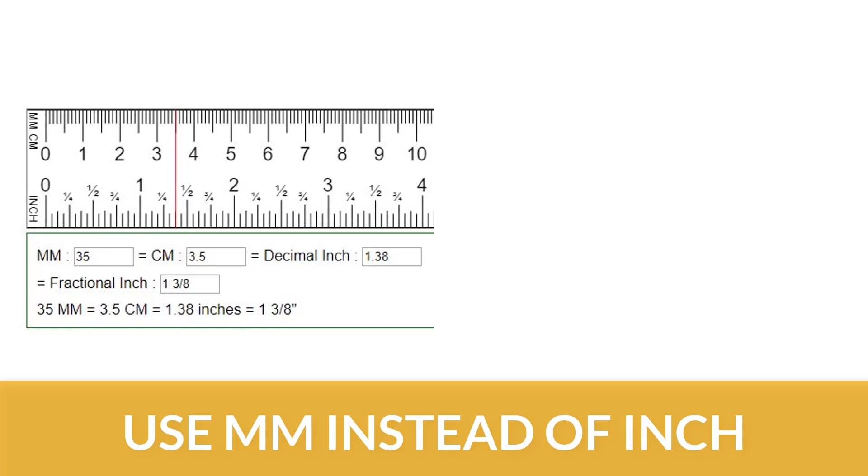That's the number one mistake from all my beginning students, designers. In the jewelry industry, we use millimeter instead of inch, and it may be confusing when you try to convert between those two units. The best way to learn the thickness is actually to have a digital caliper with you.

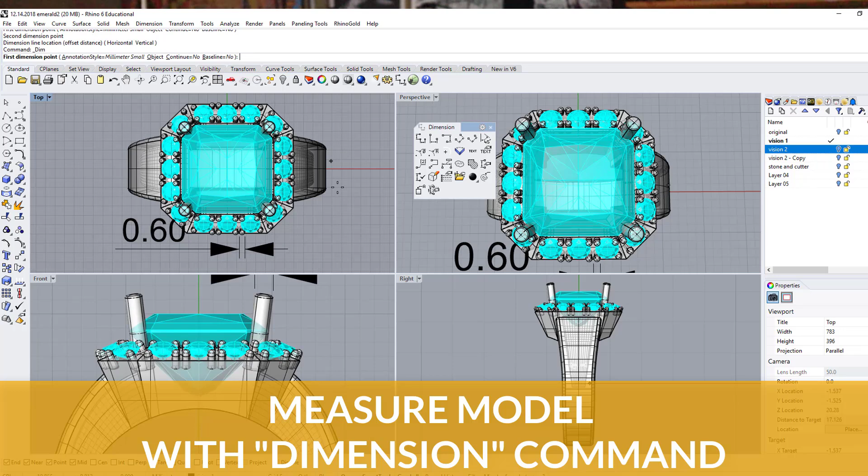Before you are ready to send out the files for 3D printing, measure the thickness of every part with the dimension tool in Rhino 3D and pull out your digital caliper to see what the physical thickness will be. It sounds simple, but many of my students didn't realize how thin 0.2 millimeter is until they see the hair-thick gap on their digital caliper.

It takes some practice. Even an experienced CAD designer may make the same mistake about thickness. I will also suggest you send it out for a plastic 3D printing first, so you have something tangible in hand to do the adjustment.

If you are in the United States, shapeways.com is the website that I recommend. Use the fine detailed plastic material, and an average ring will cost you about $7 to $10. For the beginner, it is worth spending time and money on the prototype and making sure that your parts are working the way you want before you cast them in precious metal.

This is important for the beginning jewelry designer, and it will help you gain more experience going from digital to physical print. In general, you also want to add thickness and weight to the silver design compared to the gold design in the same piece, because people feel it's worth a lot more if they can feel the weight in silver.

Jewelry CAD design tip number 2, understand how the stone is set. If you have done stone setting physically even just once, congratulations, you know how the stones are set and how you should design for the stone seat in CAD.

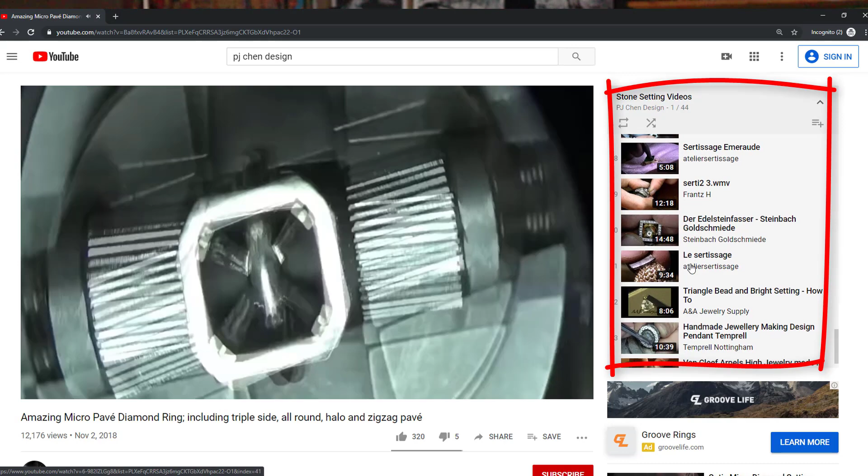If you are not familiar with stone setting terminology, you should start with something simple and most common, like prong set, bezel set, and pave set. Start with those 3 types of settings in your CAD model until you master them and move on to the rest. I will also suggest starting with a regular shaped stone like round and oval, and move on to the fancy cut with V prong later on.

Jewelry CAD design tip number 3, prong size for the stone setting.

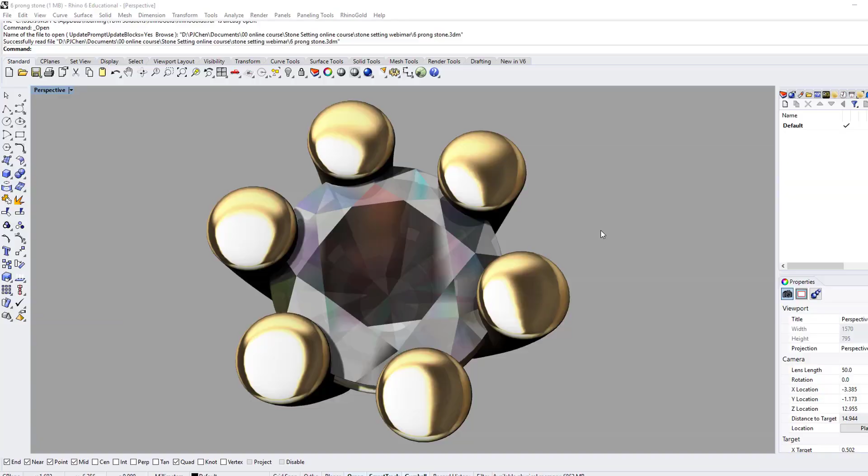After you watch a few stone setting videos and grasp an idea of how the stone is being seated and set into the metal, you want to start thinking about the aesthetics of the design. For example, if you have a 4mm round facet stone to do a 6-prong setting, each prong is 1.5mm in diameter. The stone may be super secure once it is set, but people will focus on the prongs, which are 6 polished shiny spots, more than the stone.

In fine jewelry design, we want to make sure that we expose the most stone possible, but secure the stone in place at the same time with the minimal metal. Metal plays the secondary role in fine jewelry design to hold the stone in place, so try to minimize the metal on the top view without losing security is the priority.

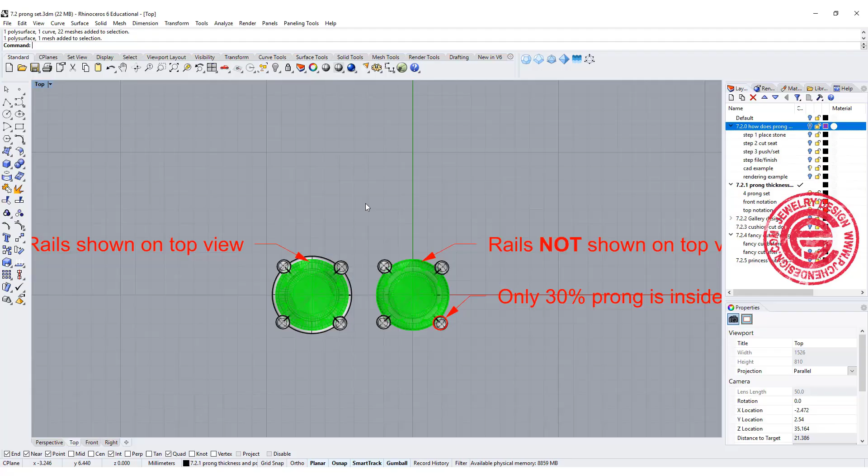Here is an example. When you make the rail under the girdle, make sure that the rail is smaller than the stone size, which will make your stone look bigger and brighter. Check out this comparison on the right. The same size stone looks smaller because the rail behind framed the stone on the top view.

Jewelry CAD design tip number 4: pilot holes on CAD jewelry models. It is critical to have a pilot hole in the jewelry CAD design. What is a pilot hole? It is the hole behind each stone on a piece of jewelry.

There are 2 big reasons to have a pilot hole when you design jewelry in CAD. Number 1, the stone will look more sparkling if you have the hole for the lights to pass through, especially when the jewelry sits in the showcase. Number 2, it will be easier to clean behind the stone later on when the jewelry has been worn for a period of time. The pilot hole allows you to steam behind the stone to remove the grease and dirt.

When we are cutting the pilot hole, we also need to be careful about the size of the hole and the length of the hole. If the hole is too narrow and too long, you may not have enough thickness for the investment to flow in during casting. It will result in some sanding texture where the holes are.

Jewelry CAD design tip number 5: consider shrinkage rate. Shrinkage is one of the nightmares for jewelry design beginners. When we design a CAD model, we tend to model the exact size for the stone. However, during the 3D printing and casting process, the jewelry piece may shrink.

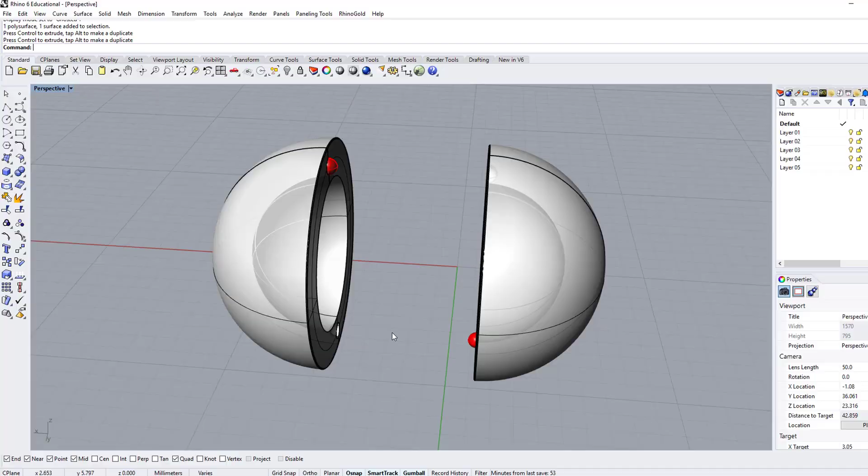Jewelry CAD design tip number 7: assemblage parts. This tip works for two-tone jewelry cast in separate parts. It will be much easier to assemble later on if they have a lock-in key design in CAD. The key can be simply shaped like a peg and hole. The locking part doesn't have to be too big, too long, or too thick.

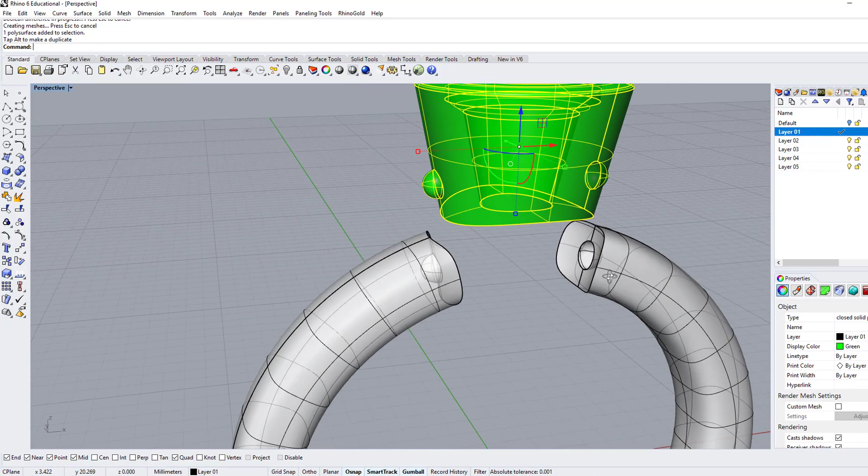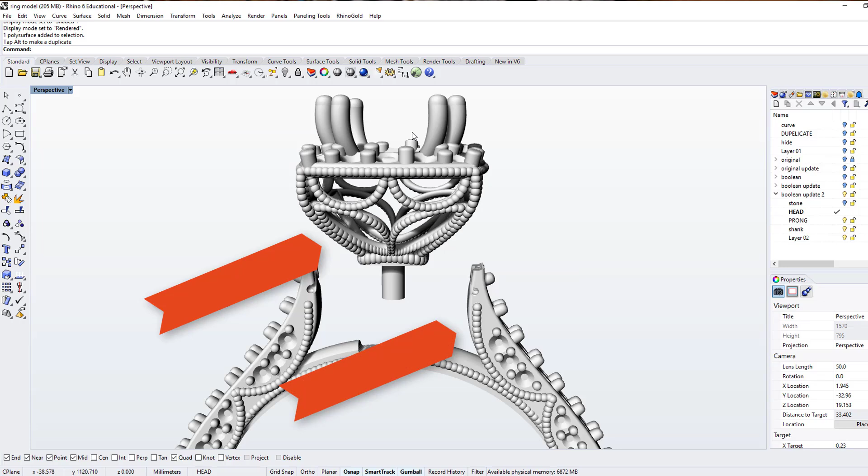Another advantage of two parts or multiple parts is you can polish them separately. Sometimes it's hard to polish tight areas, like where the prong head connects to the ring shank. It will be much easier to polish the head itself and solder or weld it onto the shank later on. All you need to do is retouch some areas and get it back to a high shine.

If you design a ring with a simple full prong head, I usually suggest you buy a die-struck ready-made head and solder it to your design ring shank, instead of 3D printing and casting the head on the ring shank directly. The reason: number one, the die-struck head is stronger than the cast piece by comparison. Number two, it's less cleaning and polish work.

Jewelry CAD design tip number 8: a well-organized folder and layer system in CAD will speed up your working time. We all heard that clients change their minds all the time, and that is true.

You will, I promise, have a client change the design 10 times and tell you at the end that they liked the very first one better. When that moment comes, you will appreciate that you didn't delete or cover your very first CAD model. Here are some suggestions I have for you on CAD file organization.

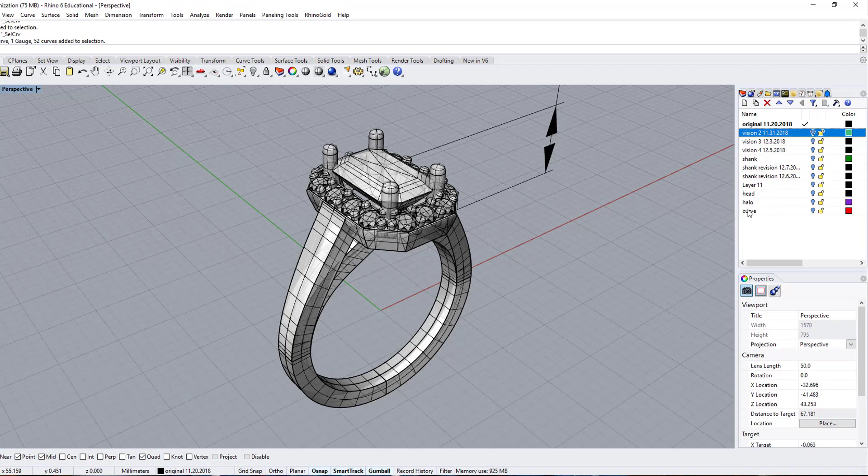Number 1: never delete your curves in Rhino 3D. It will be much easier to rebuild any model if you have the original curve. If the curves are bothering you while working on your model, just create another layer, dump them there, and hide them.

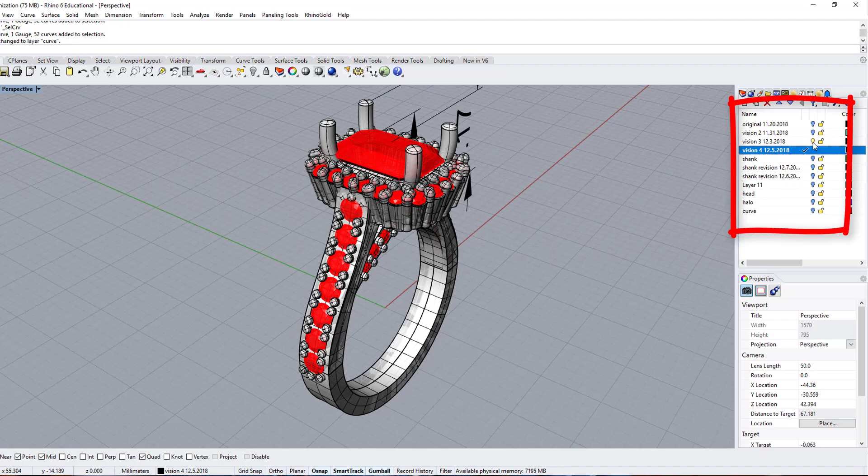Number 2: always duplicate the layers and the object before you do the boolean operation. Sometimes the client may just want to move the stone setting a little bit higher or lower. If you've booleaned them together, you will need to rebuild them.

Number 3: if the client has multiple modifications to the design, name your layers with the date you communicated with the client by email. That will help you go back to the conversation if there's any disagreement later on.

Jewelry CAD design tip number 9: find out the client's budget before you build a CAD model. I know it's exciting to do jewelry CAD design, especially on your first freelance job, but it's really important to find out the client's budget before you jump into the design process.

Communication is key. Sometimes the client has no idea how much time and material costs go into the design of custom-made jewelry. They may not be trying to be cheap, they just have no idea about this profession. Knowing someone's budget is important to avoid doing a free job, or worse, losing your time and money on the project.

My suggestion is have a 30 minute free consultation and explain the cost structure to your client. Even if they do not make a decision right away, it is okay. Everyone has a different financial situation, and it may take some time for them to think about it. A successful project is a win-win situation for your jewelry design career and brings happy returning clients. Your jewelry designer career will get easier over time if you build it right. It is a referral business.

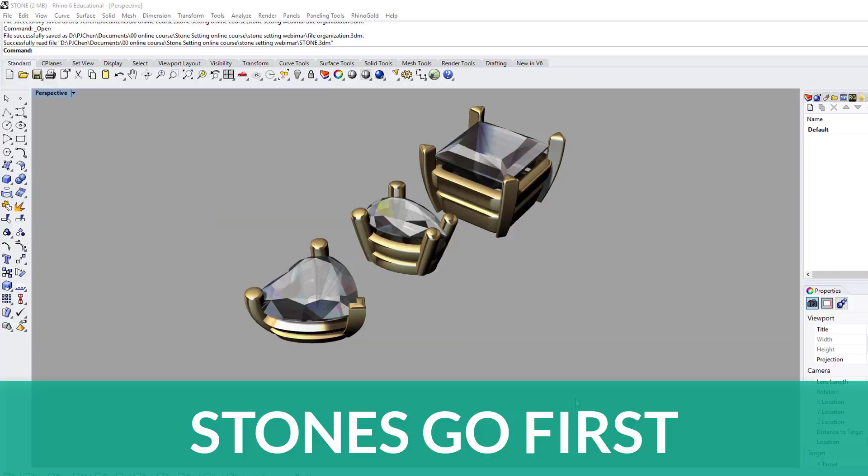Jewelry CAD design tip number 10: again, understand the stone setting. I mentioned this earlier in tip number 2, but there are some important design aspects I want to cover. Number 1, in fine jewelry design, the stone plays a more important role than the metal. The metal is there to support the stone. The metal design needs to not only hold the stone in place, but also protect it. For example, some fancy cut stones have sharp corners and need different prong shapes, like V-prongs, to protect and maintain the stone design on the corners. Understanding your prong options will expand the design possibilities for your stone.

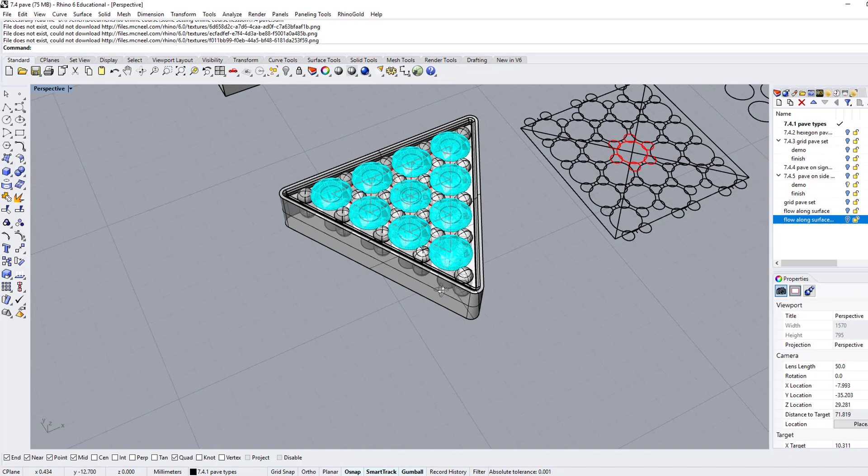Number 2, for pave or bead settings, we want to arrange the stones as close to each other as possible. The reason is the stones will reflect light to each other and appear more sparkly. But in reality, mini stones don't come in exact sizes. You may order a batch of 1.2 millimeter stones, but they come in 1.22, 1.18, or 1.25 millimeter. We need to allow some space in our CAD model.

I would suggest a 0.1 to 0.2 millimeter space between mini stones to allow for size differences. Number 3, there are some standard numbers you may want to use in your jewelry CAD model for stone setting. First, try to keep the engagement ring shank at a minimum of about 1.7 millimeters thick on the CAD model, which allows for shrinkage and polish material loss, giving you a final ring shank of about 1.5 millimeters thick, which is a durable thickness for most women to wear comfortably.

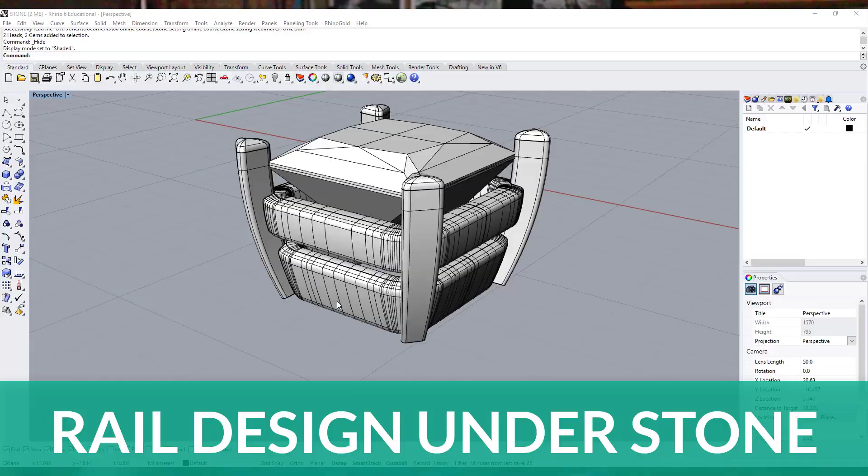Second, if you have a rail design under the stone in a prong set head, make sure the rail distance is no smaller than 0.4 millimeter. You may get the parts sticking together when printing if the gap is smaller than 0.4 millimeter. 0.4 millimeter is my magic number. I try to make my beads for bead settings equal or larger than 0.4 millimeter, and for text design, the thickness is equal or larger than 0.4 millimeter. It also applies to many other situations in stone settings.

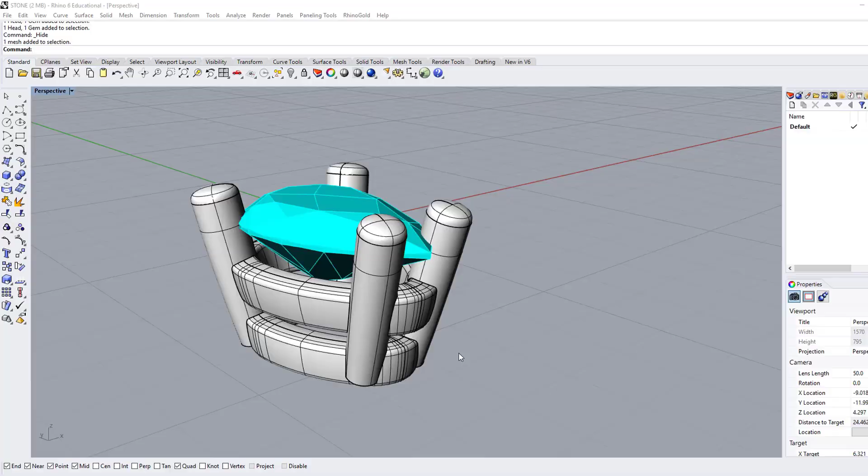In prong set situations, we want the prong to be longer than the table of the stone. You'd rather have it too long than too short for the stone setting. It saves you time so you don't need to weld extra wire on the tip of the prong if you find they're too short after casting.

So there you have my top 10 tips for jewelry CAD design. I'm also going to throw in a few bonus tips for those who want to be a freelance jewelry CAD designer. Rhino 3D software, by comparison to other 3D software, is actually an affordable choice. A lot of people in the jewelry industry use RhinoGold, Matrix, or the new MatrixGold. All of these are specifically designed for jewelry 3D modeling, but they are also all Rhino plugins. The good thing is that since they are plugins for Rhino, they all share the same commands as Rhino has. Rhino 3D can absolutely do everything you want to do in those jewelry specific software.

All you need is the knowledge for stone setting. I have proof with over 170 videos on my PJ Chen Design YouTube channel covering various topics related to all levels of jewelry CAD design, using only Rhino 3D. Taking action to get your first freelance project may sound scary, but I'm here to help you. Here's my suggestion to prepare you for your jewelry freelance career.

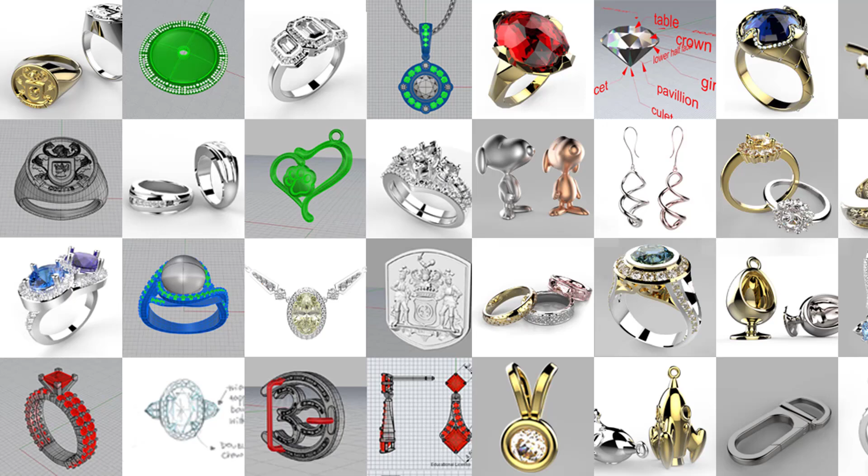CAD design freelance tip number 1 is to master your skill. Follow my YouTube tutorials and alter the designs to your own. Create some images from the CAD to the rendering. You can change the stone size and shape, and also change the thickness of the metal design. Start to create some awesome images from the CAD to the rendering. No one is going to hire someone else if they can model better than yours.

This is why I created the stone setting for jewelry CAD design course. Proper design for stone seats and placement is key to making your jewelry 3D model stand out from the crowd. CAD design freelancer tip number 2 is to market yourself.

Even if you don't feel confident in your skill level yet, you have to put your work out there. Use social media to get eyeballs, because the more eyeballs seeing your image, the greater your chances are that someone with jewelry design needs will want to hire you. Without fail, every time I post a new video on YouTube or an image of my work process on social media, I get more job offers.

Make sure that you separate your public and private social media. The easier people can Google you on your public profile and find the likes that you have, the better to gain people's trust in your CAD design skill.

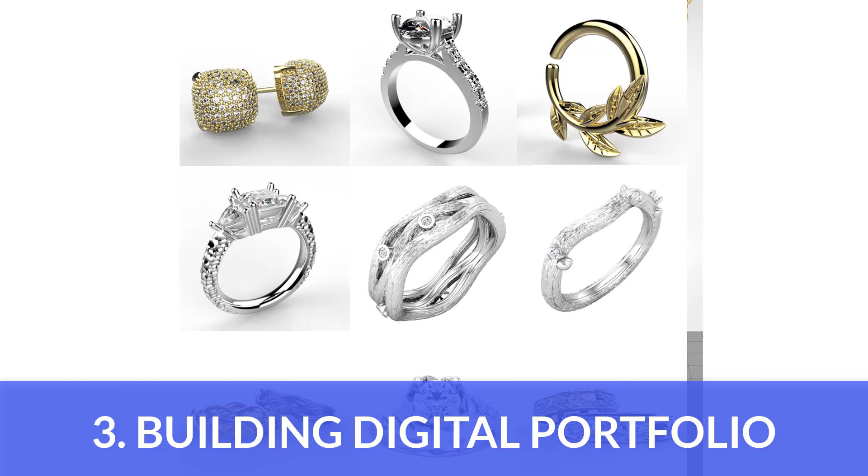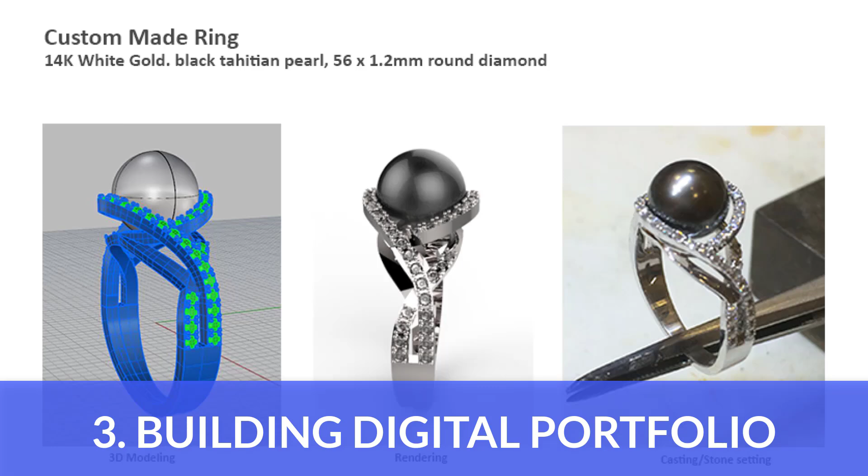CAD design freelancer tip number 3 is to build a portfolio. Create a digital portfolio that is less than 5 MB in a PDF file, which showcases your CAD design work. When you apply for a freelance job, attach this PDF file. You don't need tons of work, just 10 to 15 good ones to start with is good enough. You want to cover various work from simple to complex form, and proper stone seats for various types of stones.

CAD design freelance tip number 4 is building a relationship. The client's feedback is super important. Like when you shop online, you want to buy the product that has a 5-star review than 1 star. Always ask the clients for a positive review after you finish the project. It takes time to accumulate it, but it will get easier, I promise. I also have a lot of returning clients now, so I spend less time finding new clients.

Follow the 4 bonus tips that I have here and apply for your freelance job on Upwork.com. You are welcome to use my Upwork profile as a reference to build your own.

Building the right jewelry CAD model with proper stone setting knowledge will bring you satisfied clients, especially when everything 3D prints and the stone setting is done correctly. So now I want to dive into stone setting for jewelry CAD design course. For those of you interested in learning more beyond just the free training, here's a look at what I'm including in the paid course. I have 60 videos broken down into 12 chapters.

First, stone setting concept. Second, how to model different types of stone. Third, understand gem cutters and pilot holes in detail. Then different types of stone setting. Number 5, 3D printing guideline for each type of setting.

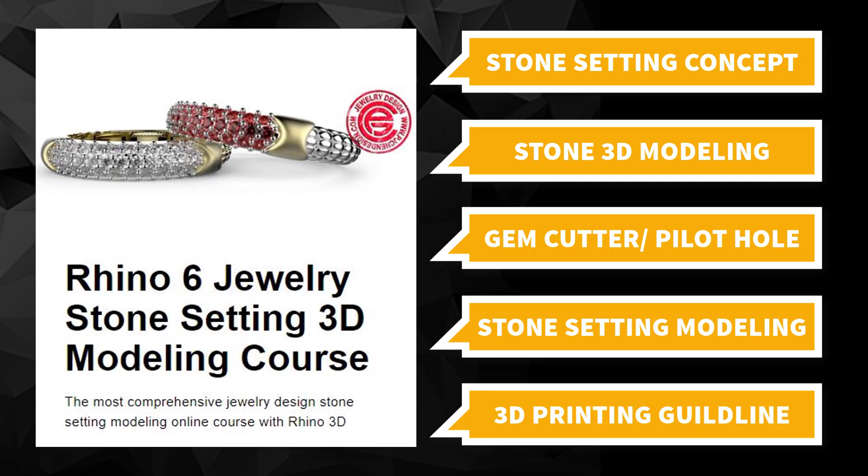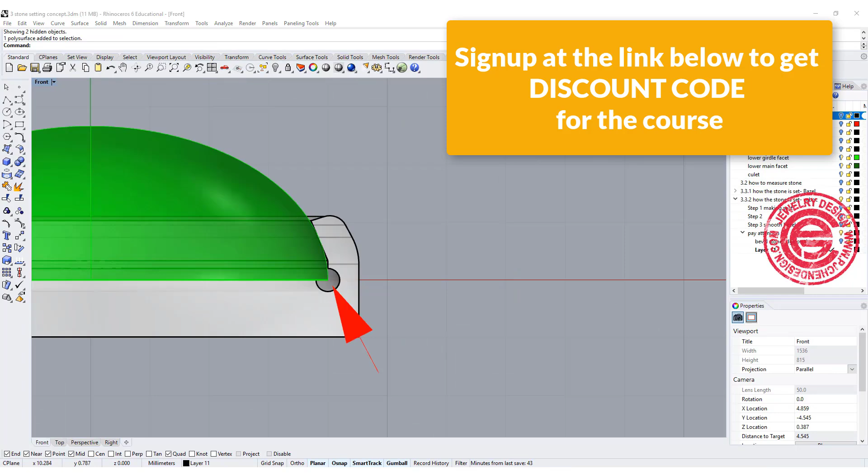In the first section, I would like to walk you through the concept of stone setting by illustrating the stone profile and explain how the stone is actually being held in place. Having correct stone setting terminology is important when communicating with your clients. Not only do we discuss faceted stones, but we also include cabochon and irregular shaped stones.

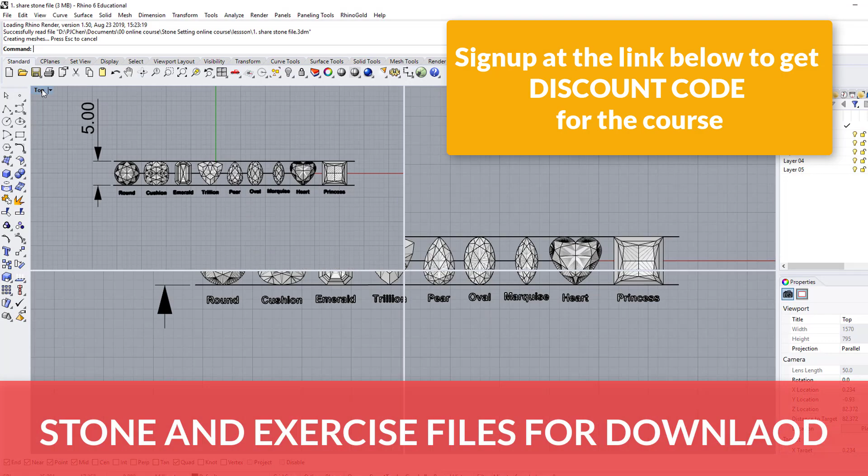In the second section, I will show you how to model different types of stone, including the regular round and oval facet stone, and also the fancy cuts like pear and emerald cut stones. The course includes the top 9 most used facet stone models for you to download, but knowing how to build a stone model is important in case you're running into a project that has a unique cut stone.

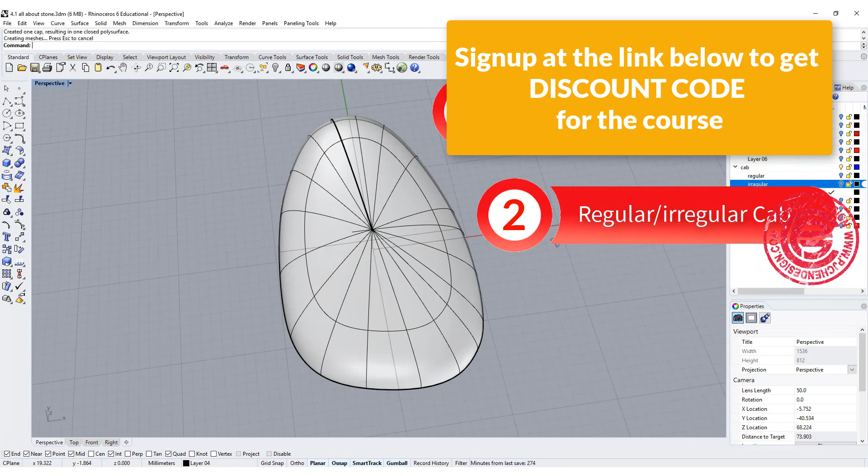So you will know how to build a stone model in order to build the jewelry model for it. This section also includes how to build regular and irregular cabochon stones. In the following section, I will show you how to design a gem cutter to seat the stone, and the proper size of the pilot holes behind the different types of stone in detail.

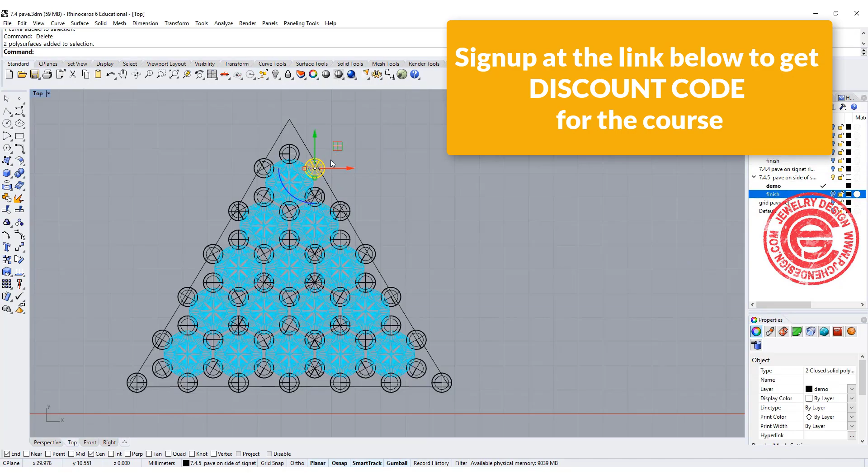Section 4 is the main focus for 3D modeling on the different types of stone setting: bezel set, prong set, bead setting, pavé setting, channel set, and flush set. In addition, I will also discuss how to design the setting for halo and cluster style jewelry.

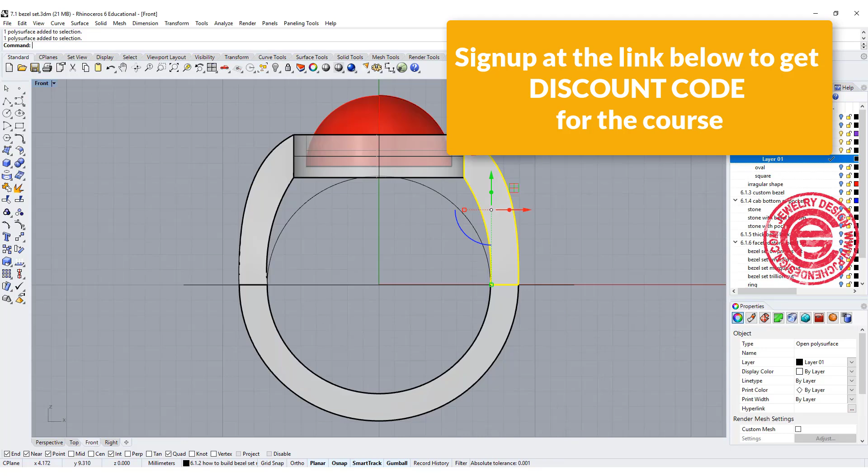Finally, the goal of the stone setting 3D modeling course is to design jewelry for 3D printing and production. The details on 3D printing standards and how to avoid errors are discussed throughout the course, and the course is in systematic order for both beginner designers and experienced jewelers who want to switch their work from hand carving wax to CAD and 3D printing using the Rhino 3D program.

Remember, knowing how to model stone setting properly in CAD will separate you from other CAD designers. That is for my top 10 tips for jewelry CAD design. I hope this training gave you great insight on jewelry CAD design, specifically in stone setting 3D modeling with Rhino 3D. I hope you guys enjoy. Thank you for tuning in, and if you have further questions, please let me know.